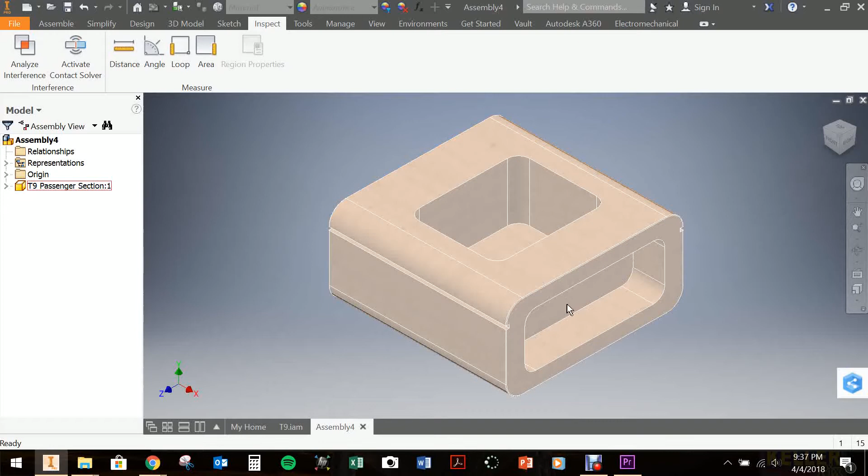And I need that piece of information because I need to know which of the blocks to put in where. If you'll remember that the front of the car had the 1-block assembly, so the connector part that goes here is going to be the one block socket. So let's go ahead and go back to assembly in place and look for that 1-block socket. Open that up. I'm going to need to rotate that. It looks perfect. That's what I need.

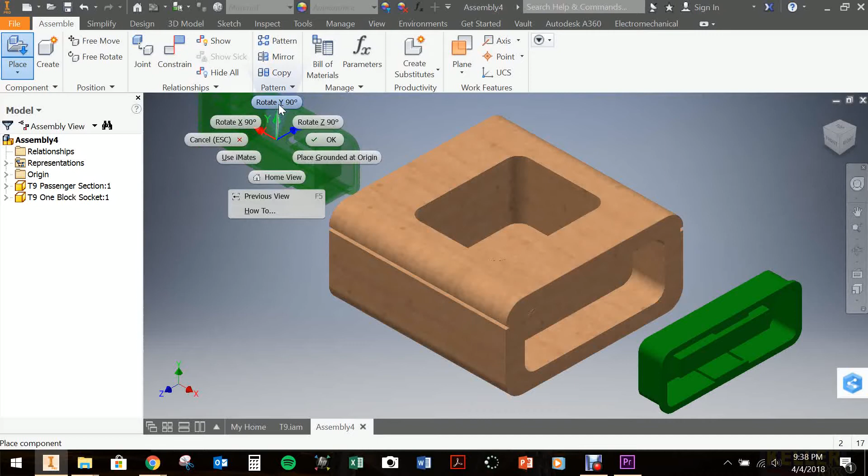And so the 2-block socket now is going to go in the back side. Rotate on the y-axis, and I think I need to do that twice more. Yep, there you go. All right, so I got the 2-block. And the 1-block. I need the passenger base. Before I start adding anything else, let's do the passenger base.

Rotating it on the x-axis 3 times because I need that right side up. And that triangle piece there goes in the front left corner, that's where the driver sits. So I'm going to have to rotate this on the z-axis also 1 time. Perfect, because that's going to sit in there just like that. The triangle part goes towards the front. All right, 1, 2, 3, and let's get the windshield in here too.

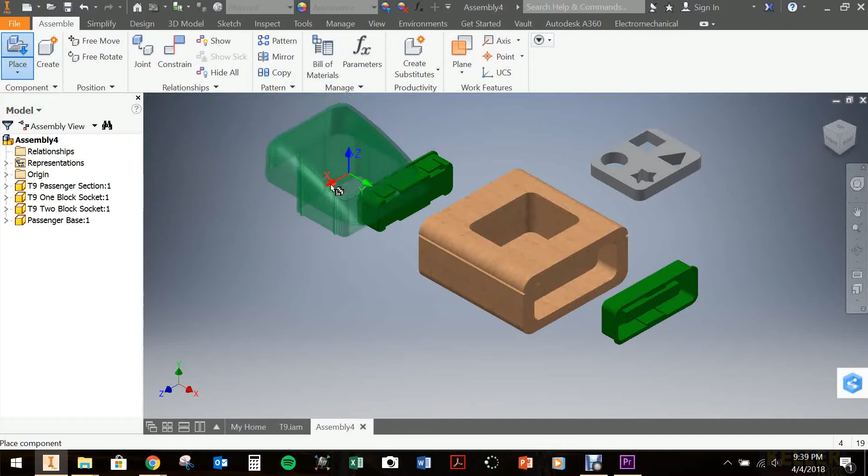And so we're rotating on the x. And I need to rotate that on the z also. Of course, I have to do it 3 times because 90 degrees one way is 270 the other. There we go. That's where that part goes. So let's just set it up on top here for now. All right. I haven't grounded this base, so let's start with that.

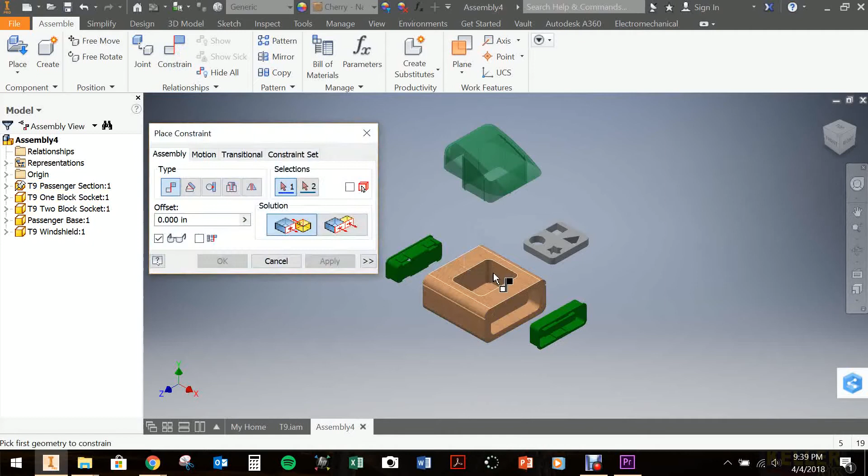And now I'm going to go ahead and just do the same flush and mate constraints to get these 2 pieces in place. So let's start with a mate constraint. Again, we'll catch the top of this, get the rectangle, get this view of the other underside here, mate that, apply it. All right, I got to pull this out so I can see it. Let's just pull it over here, make it a little easier on everybody.

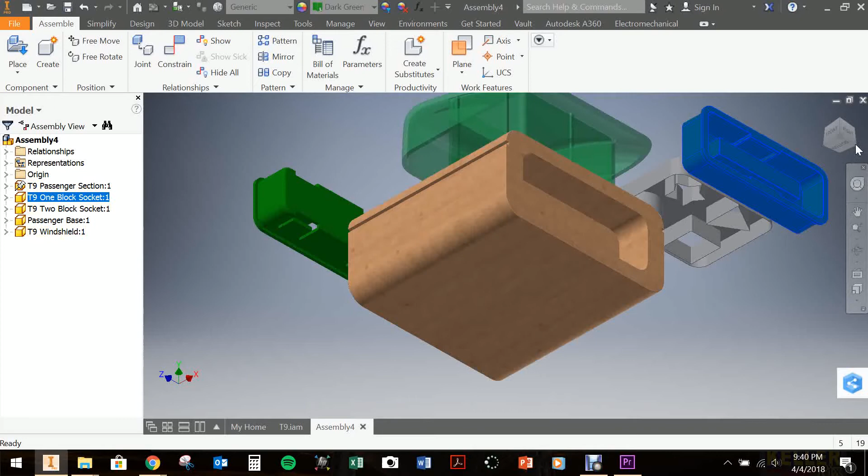Do another mate constraint. Again, I want to catch this rectangle and mate it with this side here. Apply. Last, I need the flush constraint. There and there. Okay, go back to my home view, and that piece is in place. Let's do the same thing on the back over here now.

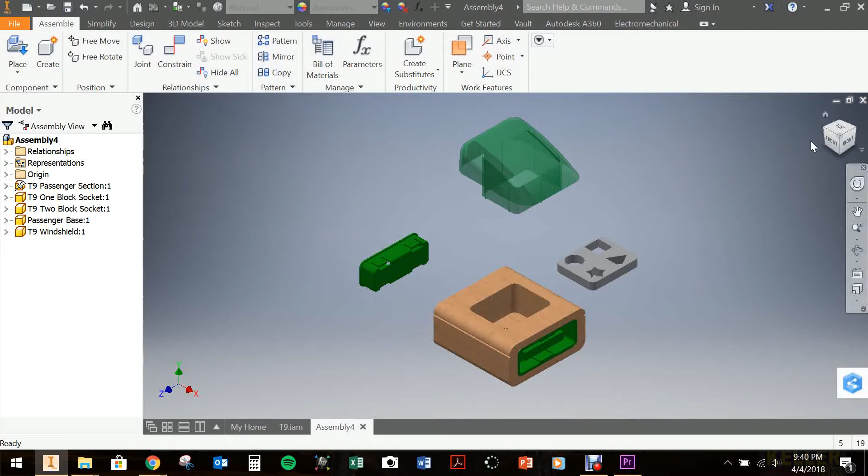All right, do a mate constraint. This top, and change my view so I get there. Apply that. Drag this part out. Another mate constraint.

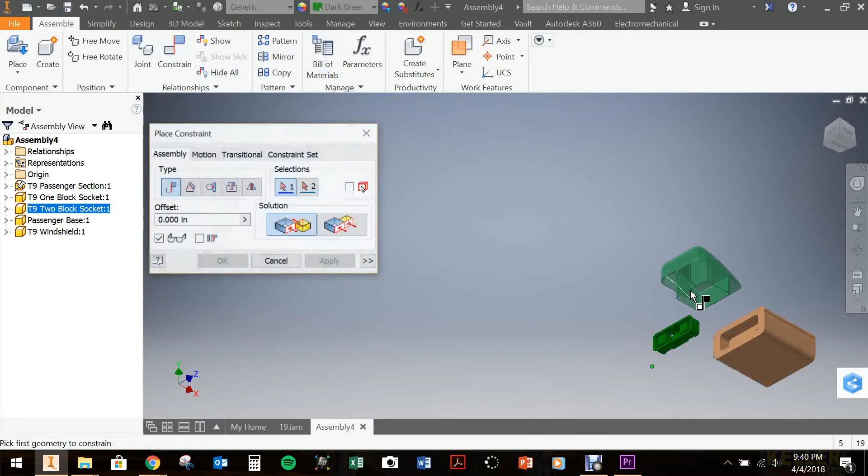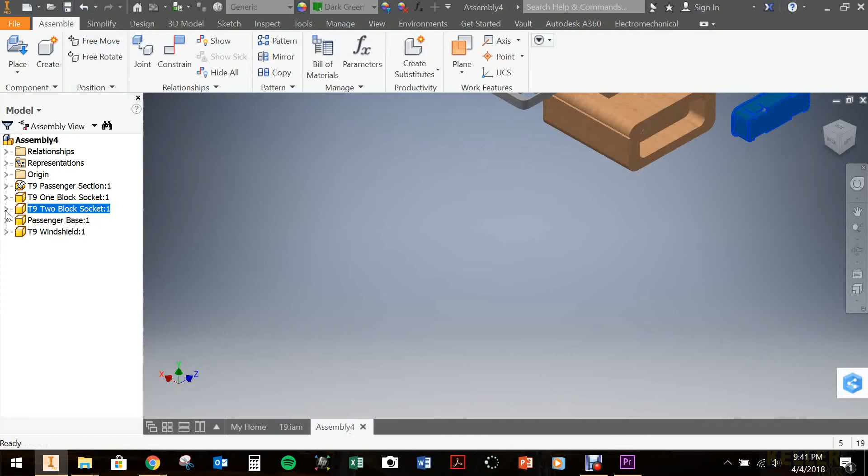And then catch this other corner over here. And then the flush constraint. So make sure you hit apply first. Shoot, I just flushed that. So I just made a mistake. So I'm going to go and delete that flush constraint. Delete it. Got a little ahead of myself. Let's see. That caused that to free rotate. So let's flip it back around because I know if I don't, it's going to cause me grief.

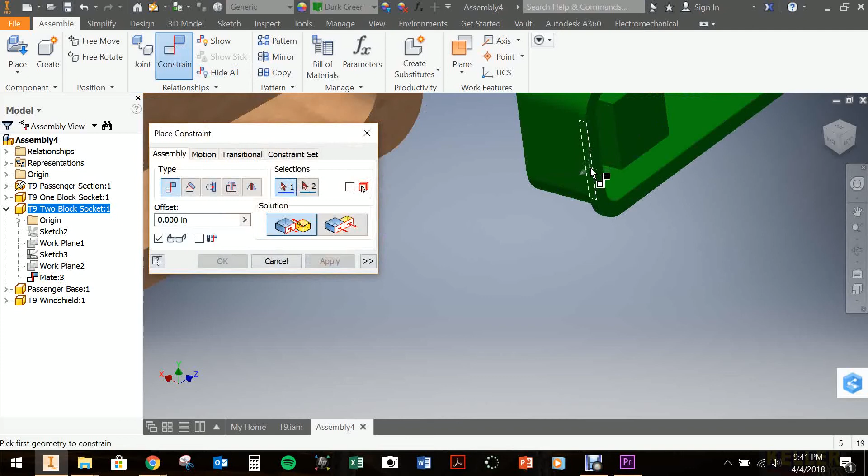Okay. Let's see. Where am I here? I did this top one, so I need to do the side. Let's try that mate constraint again here. Sorry about that. Once there. And once there. Apply. Now let's do the flush constraint. I did not hit apply before switching it to flush.

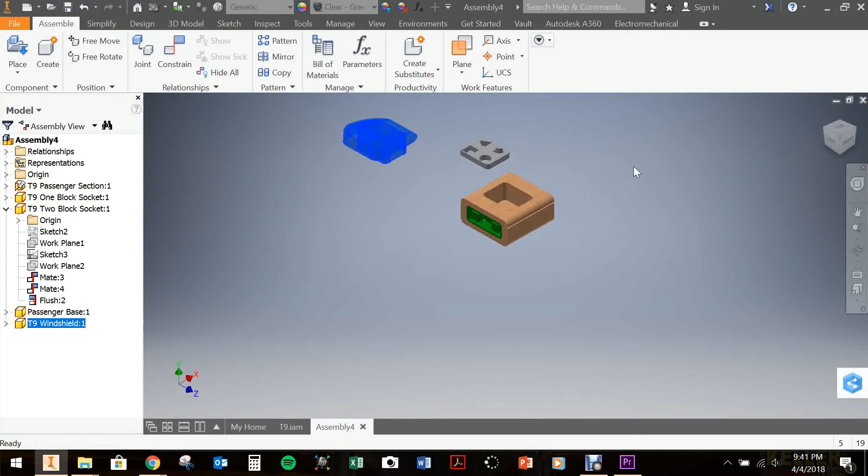Okay. All right, so now I mentioned, this is the back side, this is going to be the front side, and that's where that triangle needs to go. So this is pretty easy here. I'm going to go ahead and just do a mate constraint with the base and the base of the passenger section, because it has to go in here.

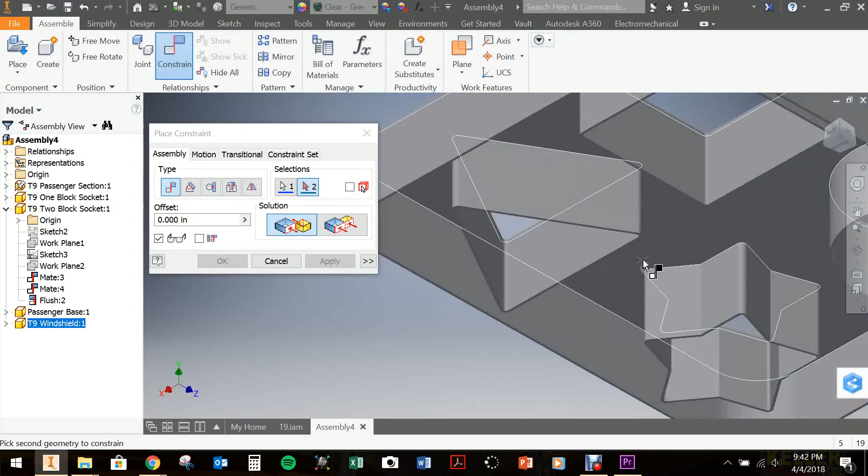All right. Now when I get the passenger section here and I want to do this base, I want to make sure that I catch, again, one of these little rectangle pieces like that. They're really narrow, so you may have to zoom way in and apply that. Well, I'm going to go back and hit the home button just to get me all reoriented. Okay, so here this piece is still floating around, but it's now flush with the bottom.

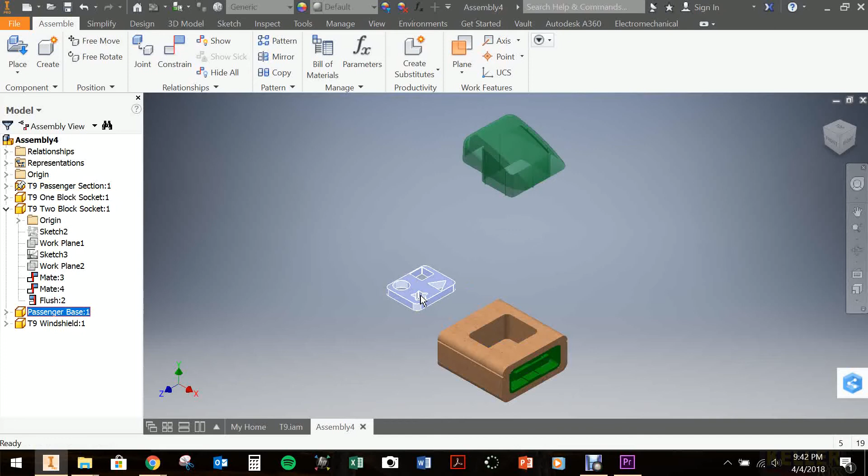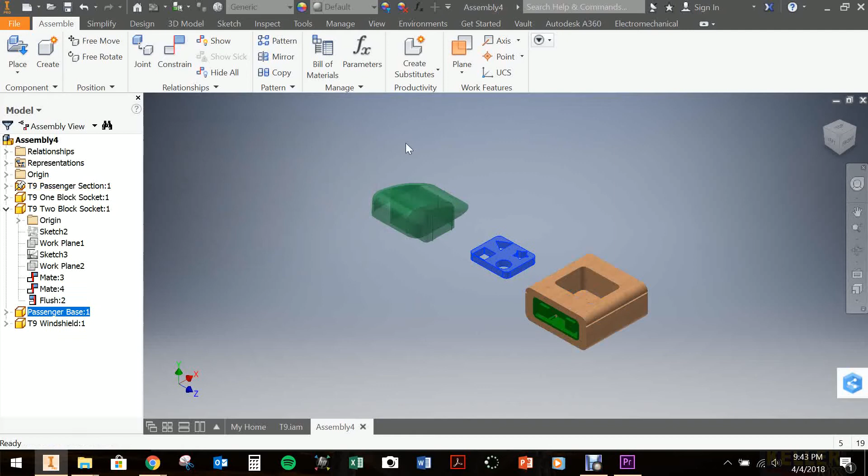I should be able to just use the mate constraint on the sides and the front, so let's try that. Mate constraint, this front with this front, apply. And now let's do the side. So another mate constraint, this side with this side.

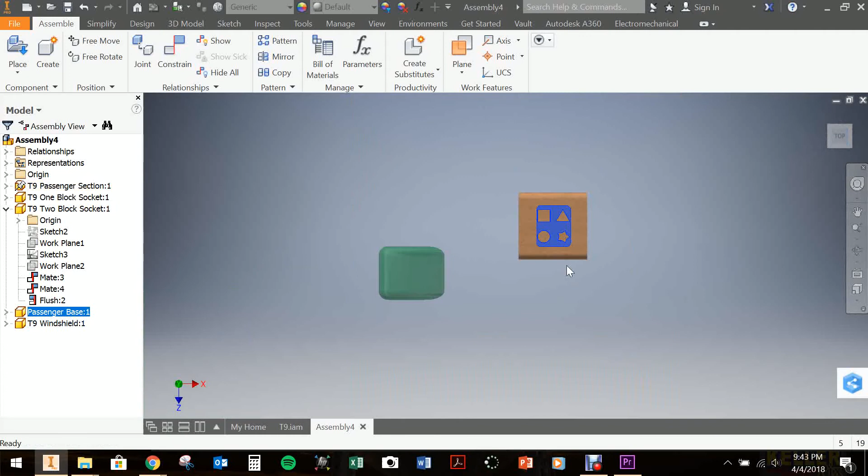And let's go back to home. And I think that looks pretty good. Let's just inspect it real quick. Looks like it's centered up pretty good. It can't move. We're in good shape. All right, last piece to go.

Now on this windshield, if you'll note real quickly, there's these little grooves right here and then in the front. Those are the parts that are meant to mate up with these walls in here, and they're designed to be just a little bit bigger so that they create a friction hold as you push it down, and it holds into place by those two tabs.

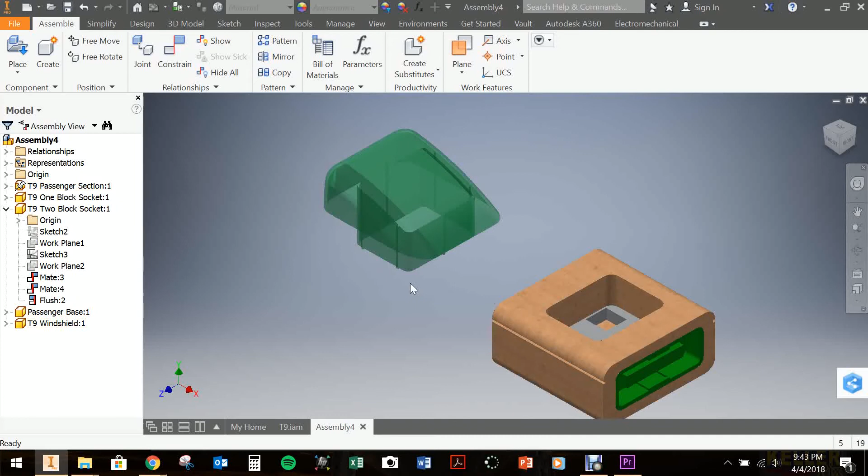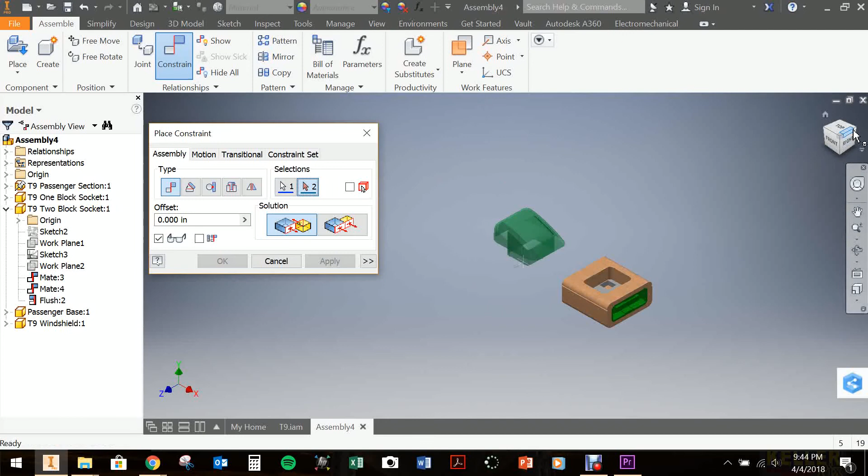So when I mate this, I want to make sure that I mate using these extensions, not the flat part over here. So I'm going to go ahead and just do a mate constraint between this part, and I need it on this face right here to keep it pointing forward. All right, and I'm going to go ahead and do the same thing with the front now.

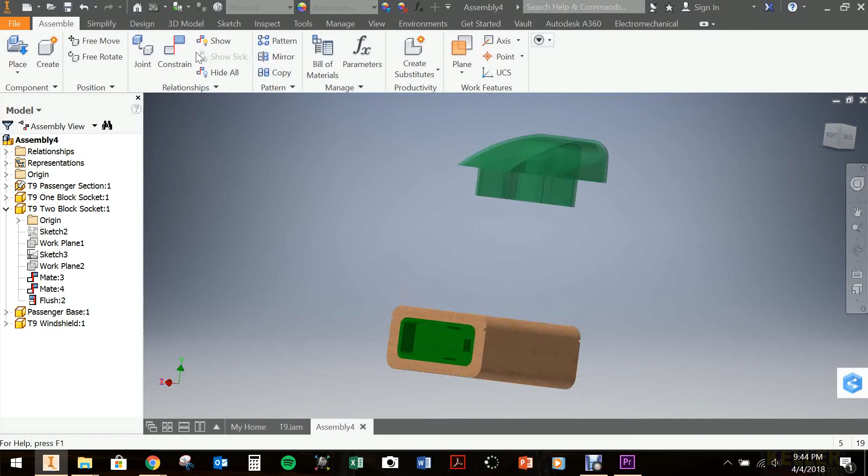This is a little hard to see just because of the color and texture, so I'm going to kind of get it at an angle so I can see it a little easier. Do this constraint, and I'm going to zoom way in here. Again, I'm looking for this flat surface there, and that's going to mate with this front part right there. Apply, cancel. And now I can't go side to side. I can just go up and down.

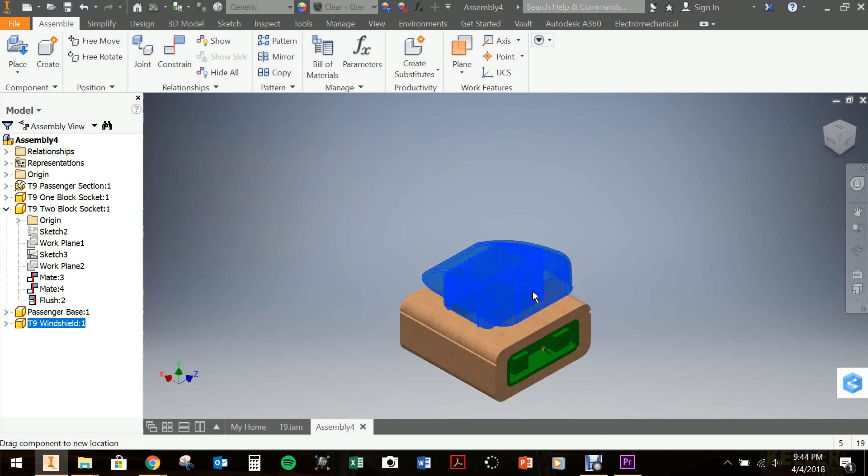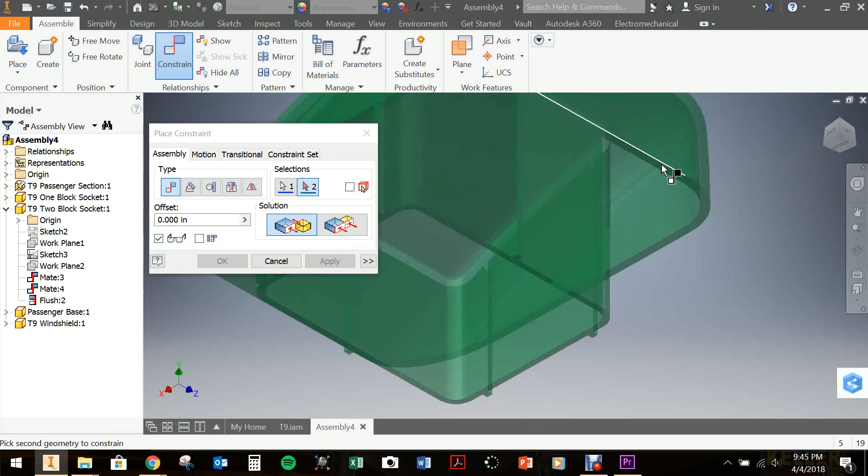This piece is meant for the windshield to sit right on top of this part here. So again, just a simple mate constraint between this and the bottom here should do the trick. So let's try that. Mate constraint. Make sure you get the flat part there. Let's get up underneath here. We want to get this ring right there. Awesome. Looks like that worked.

Yep. So that is assembly 4 properly constructed. Save that as assembly 4, and we're ready to go to the next level.